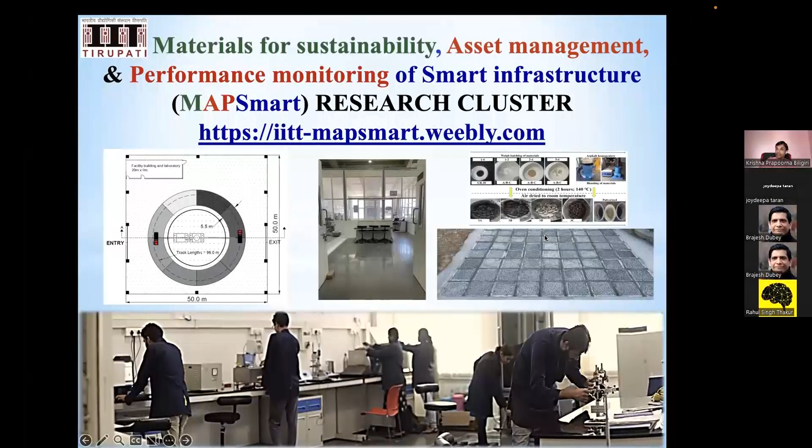I just mentioned one of the other systems we have been working on. We do a lot of fundamental research catering to binder characterization, rheology, and so forth, and then moving on to the aggregates, the rocks, and then to the mixtures. So if you look at the pavements, we actually have the mixtures. It's not just the binder or the aggregates.

If you look at the older pavement systems we had about 50, 60 years ago, they were all made up of aggregates that were not that strong, and they were basically virgin materials taken from the quarries. So they were all natural resources that we have been depleting over the last several decades. What we have done over the years is to start manufacturing our own aggregates. That's where the circular economy comes into picture.

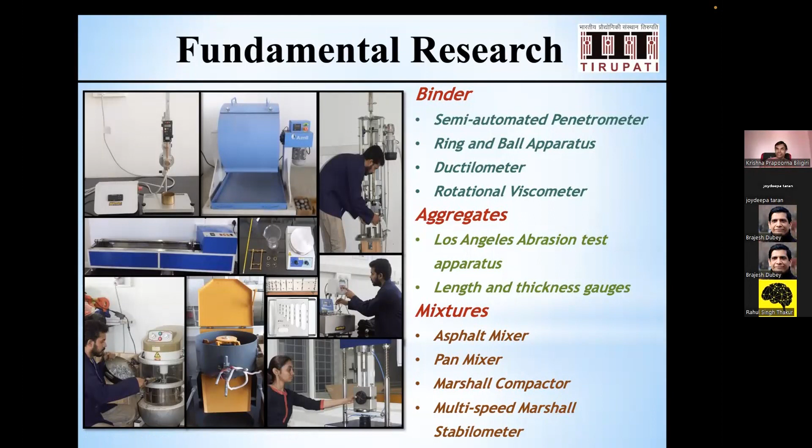And then we have also started building mixtures that are conglomerates, composite structures. I'll explain that to you. So we also do a lot of state-of-the-art advanced research.

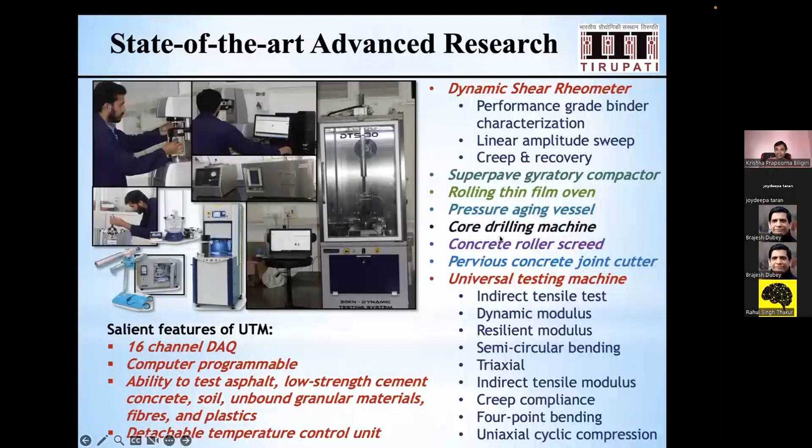We have state-of-the-art equipment worth more than 4 crores. We are also building another 20 crore worth of lab, which will cover not just this, but also many other accelerated testing facilities. So these are the projects that we have right now.

Currently, we are running close to about 17, 18 crore worth of projects, all the way starting from the national highways. That is a flagship project where we are coming up with new performance metrics for the national highways, and also that could be - it will actually ramify for the state highways and other district roads.

The other thing we have been very actively working on is the collaborative project, transfer of technology from India to other countries. For example, the University of Sharjah, which is based in the UAE, United Arab Emirates, they have actually asked for the technology transfer from India.

So we have been transferring technology of our pervious concrete, and Professor Dubey is very much aware. In fact, even Ravi Shankar is. One of the speakers today who will be speaking in the afternoon was actually working on the project on pervious concrete development, Dr. Anush. He was one of our students at IIT Kharagpur, now a faculty at Bhubaneswar.

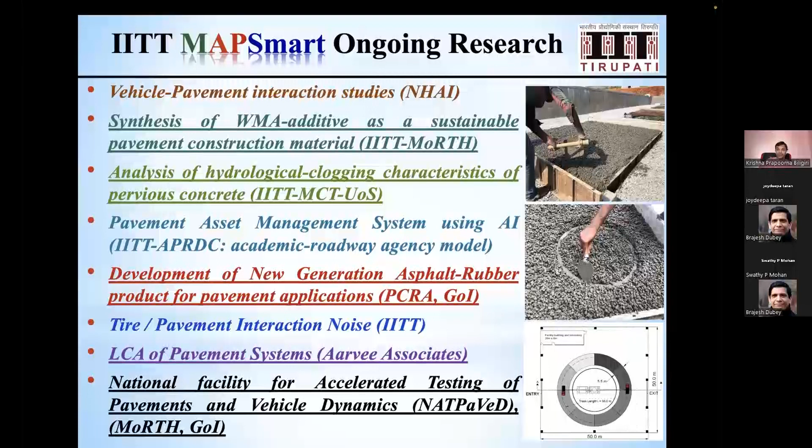We have a circular track with two trucks running continuously, and what we're trying to do is accelerate the performance. So if you want to get the performance of a pavement system for 10 years, you can get that done within 3 months. That is a flagship ministry project, and we will be mentoring many other zones or institutions in the coming future, should this be very successful.

It's a first of its kind facility in the world, I should say, because there are no facilities in the world where they're running actual trucks. They're mostly dual tire assemblies, or it could be a gear assembly running to understand the accelerated performance, but what we are doing here is having actual trucks.

We have a tie-up with Ashok Leyland, one of the pioneers in the automotive industry, where they actually told us they'll give us 2 trucks to work with, BS4 trucks. It's a conglomeration of 2 important departments in the infrastructure area: civil and environmental engineering, and mechanical engineering. So we are running this project. It's a very, very important project.

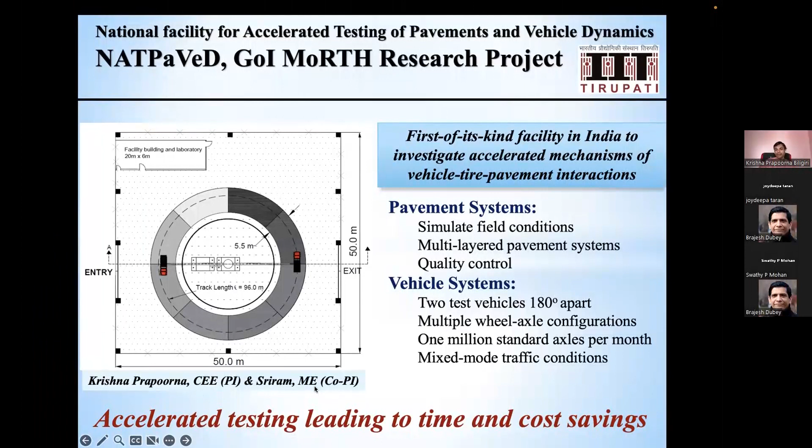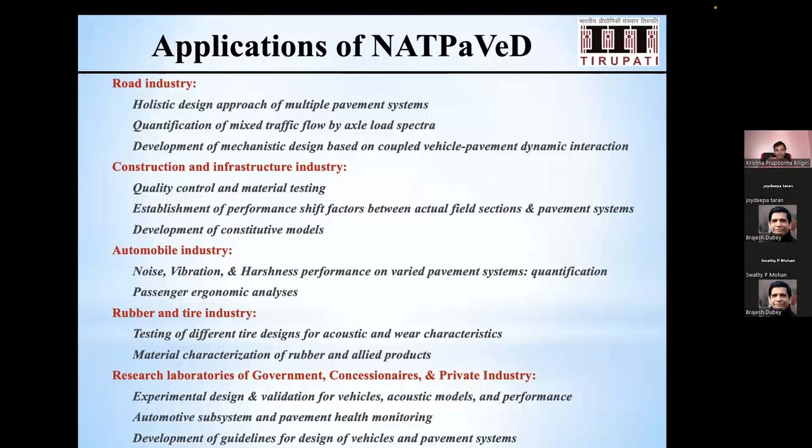Where we are applying this facility is again road industry, construction infrastructure, automobile. Circular economy comes into picture again, where the rubber industry plays a major role, not just with the pavement system but also with vehicular tires. So if you wish to change your tires on the truck and want to test these, you should be able to do that. A lot of government bodies and concessionaires are all part of this.

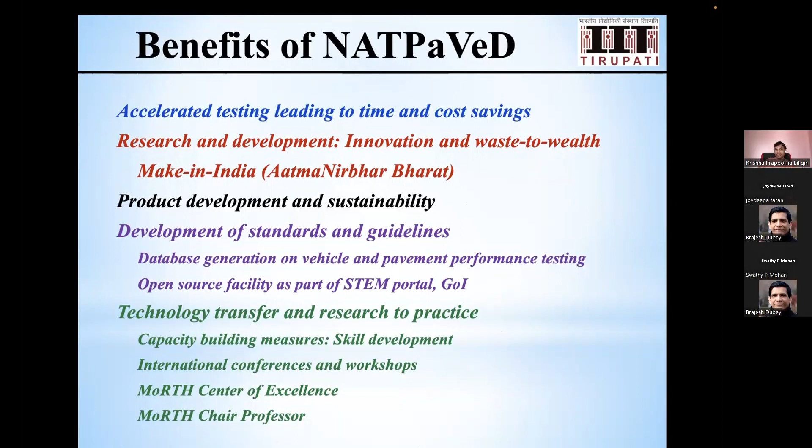And again, it's fully made in India, Atmanirbhar Bharat. That's something we have to do, and we are also in discussion with the Ministry of Environment, Forest and Climate Change. That is related to circular economy, where we are coming up with standards and guidelines that will clearly touch the SDG, Sustainable Development Goals. As part of this, we'll also be doing a lot of things.

Now coming to the circular economy as such, we talk about the pavement design. What we do is discretize it: one is the material aspect, which we are very familiar with. We have been able to do this for the last 100 years, and we have been very successful, including in India, where we are able to capture the material properties, the strength parameters, the deflection, and so forth, including in the field. But one of the things we haven't taken care of is the uncertainty.

When I say uncertainty, we are not touching the dynamics of the vehicle. So at least 3 of our students have been working on this uncertainty, including incorporating that into the vehicle type. If you look at the current design standards, we are looking at one vehicle type across the world. It could be an 8-ton vehicle in India, 8-ton somewhere else, but it's just one vehicle type.

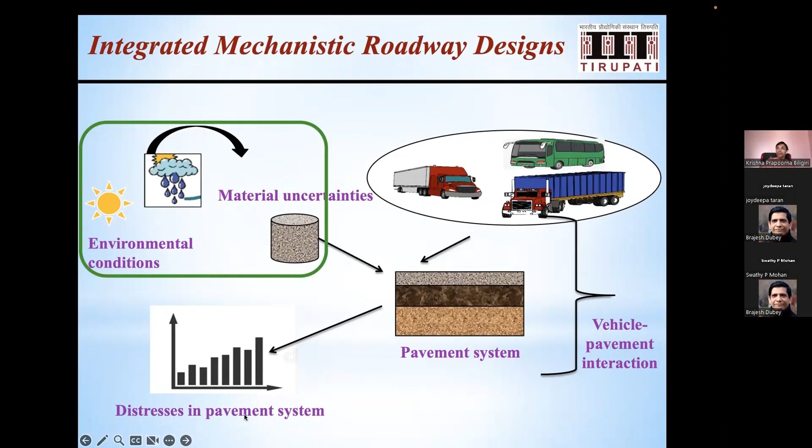What we are trying to do here is integrate several standards. Then we have different vehicle types, material uncertainties, and then again come back to predict our pavement performance. That is where we are today in terms of mechanistic design.

Coming to emissions, the Conference of Parties, COP, is going to take place in Dubai very soon. IIT Tirupati has also taken initiative in conducting a workshop very soon, which we'll be doing on climate change. I'll explain that later when time comes.

So what we have to do today is, we have this pavement side, that's the harder side. Then there is this traffic emission coming from the vehicle exhaust. We have to integrate these two. Today we don't have that. Why should we do this?

Because we need to have three important facets coming out of this and understand the entirety of this: one, coming from the environment, two, economy, and then the human. So we have to touch upon these three very much, and that only will help us understand the damage being caused to the transportation system.

And that's where I think this decarbonization comes into picture, when we integrate both the hard side and the soft side. We are capable of this separately and this separately, but we have not integrated these.

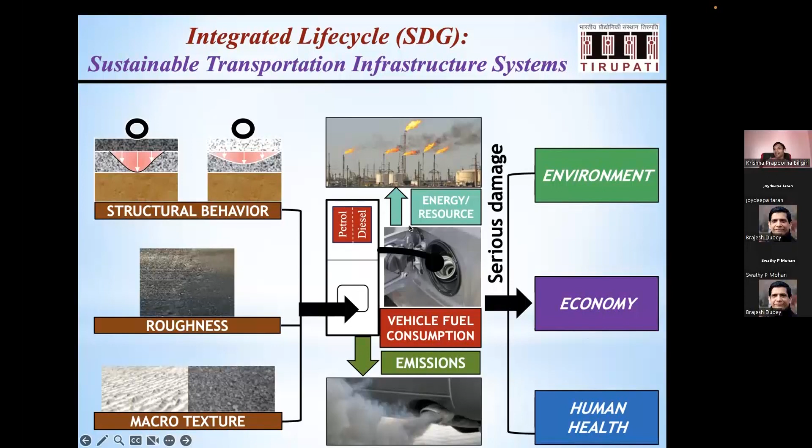So one of the things that we think, okay, this is our group, MAPSmart group, has very clearly thought about for the next 50 years. I've also presented this as one of the visions for TIFAC and DST, that we are looking at the cause effect model, but we are not actually looking at the circular economy model.

We're looking at source problems, right? We're looking at development, operation, and maintenance discretized. So they're all separate now, separate entities. And that is actually costing a burden on the resources.

For example, if you go to a quarry, we are pulling a lot of natural resources, all the virgin aggregates, virgin binder that we are using. We are not able to recycle it to the extent that we would like to. For example, if you say I would like to use solid waste in roads, are we really capable of doing that today? I would say no, not fully.

C&D waste, construction demolition waste coming from buildings, we are not able to completely utilize. If we talk about rubber, we have been successful in utilizing approximately 15,000 tires per lane kilometer. That is good, because we are able to utilize end-of-life materials, and that goes back to building a new system. So it's an old material being used to create a new system. That is circular economy, that's actually good.

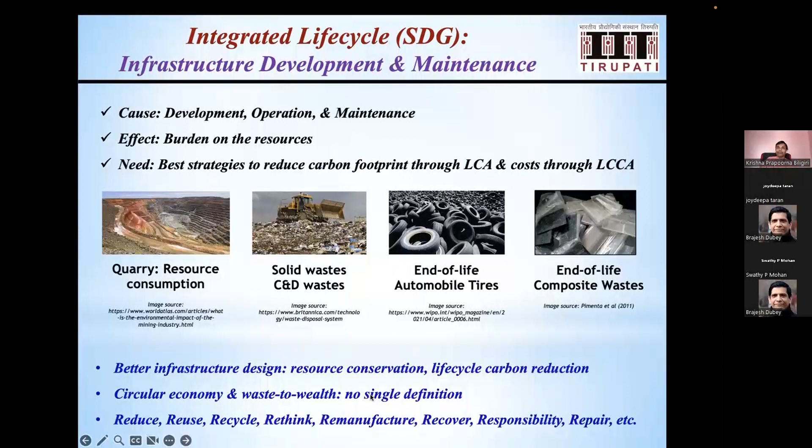But there are more than 12 or 13 R's, and what we envision, and this is my vision for the next 50 years, is that we move from linear to semicircular and then transform ourselves from semicircular to fully circular. And how is that? You see here, it's all very simple. It's a simple concept, I'm saying, because it's actually easily understood by any layman. There's nothing esoteric in this case.

One is recover and recycle. That's where we are today. We are very successful in this case. That is linear, where we are able to recover the materials that have been used over the last 20, 25, 30, maybe 40 years. We are able to recycle that, which also includes now the end of life tires, end of life waste. For example, composite waste or plastic, they're all being used in roads. Now, recover and recycle is what we do today as part of linear economy. Some other people might differ with my definition, but based on my literature and also our group, we found that this is still part of linear. Someone can correct me later on.

Then, what we are trying to do today, and I think we are at the cusp of doing this full-fledged, is we are able to remanufacture the recycled products and recovered products into sustainable materials. And that is where the green material concept has come into picture, and we are able to target LCA very clearly. So that's where we have this resourceful extension of lifespan. Today, if someone says, okay, I'm going to use older materials into building new structures, new pavements, people will get skeptical. Oh, it will not be that strong, long lasting. But we have actually found that if you recycle rubber, composite waste, plastic, it lasts longer than conventional materials. So we have actually been successful in that, right?

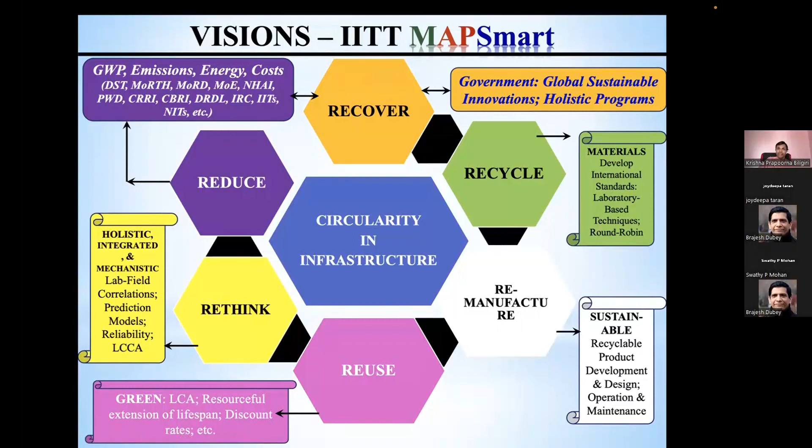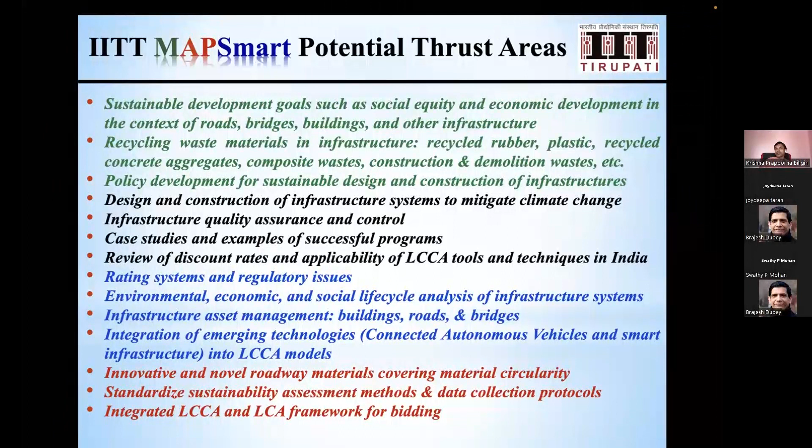I'm actually a member of this committee. Now I'm chairing this global committee on pavement life cycle. It's a committee that's calling for papers. The papers are due. It's a full-fledged journal owned by Sage, but linked with Transportation Research Board.

This is the flagship transportation research forum across India, where I'm a committee chair. We still have time for 40 days. And we are actually touching upon several ideas, SDGs, and many other areas such as material circularity.

Okay, and then discount rates, advancements of standardization of policies, and so forth.

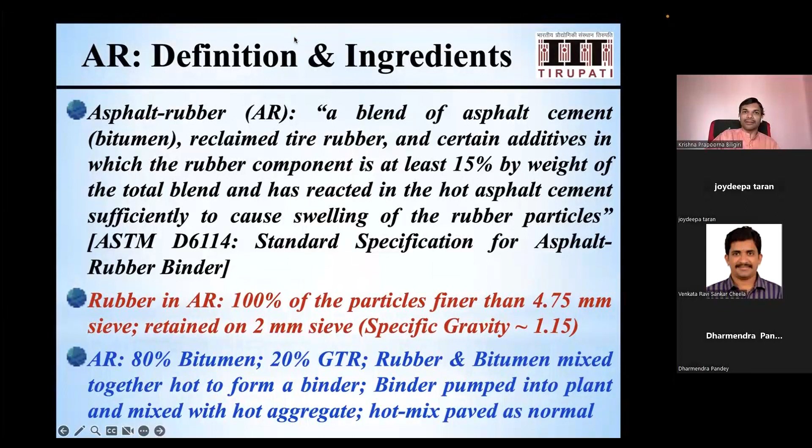Someone has to mute. Yeah, so today what we do is we have about 8 to 12% rubber in asphalt cement, which is still not bad.

Can you hear now? Yes sir. Okay, I'll just repeat what I'm saying - so we're trying to look at 30,000 tons being recycled into our pavement system, and that's 100% of particles finer

than 4.75. If people are civil engineers, you will understand this better - 4.75 millimeter is the benchmark above which we have coarse aggregates, larger size aggregates, below which we have fine aggregates. So we're looking at 100% passing this size and retaining on 2 millimeter sieve, and you can see the specific gravity of this material is approximately 1.1 to 1.2.

And that's very close to asphalt cement - that is why they're able to blend well. Now what we are saying today is if you are able to recycle 20% within asphalt cement, you produce asphalt rubber, and that gives you a super product.

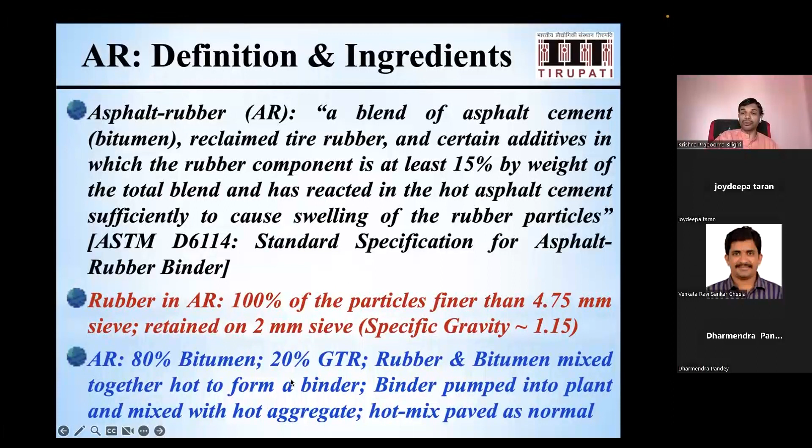I call it a super product because it's being used across all layers - as a strong base, and also a wearing course. When I say wearing course, that's what you see on roads. And it's being used across various climates.

It's used in very hot climates such as Kharagpur, 80 plus degrees Celsius of pavement temperature, to minus 40 degrees Celsius in cold regions, including Canada, Sweden, Nordic countries, and so forth. It's also used as a very thin layer to replenish groundwater - how is that? Because it's a porous mix, you can create a porous mixture with asphalt, which translates into a very strong structural layer and a functional one, both.

And it's also being used as a composite - you see, a concrete layer is there, and on top of that I'm placing asphalt. So it's being used in several technologies, and we call this a perpetual pavement system.

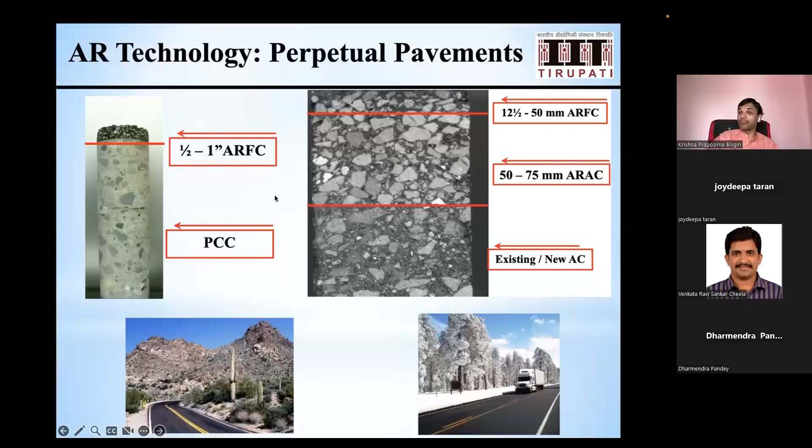Why do we call it perpetual? Because there are an umpteen number of benefits coming out of this. It's definitely more durable, and we have tested this - there are a few sections. If you go to some states in the US, there are sections which have lasted 35 to 40 years, with excellent skid resistance because it offers open texture, larger size aggregates, and a smooth ride, which is what you want to see.